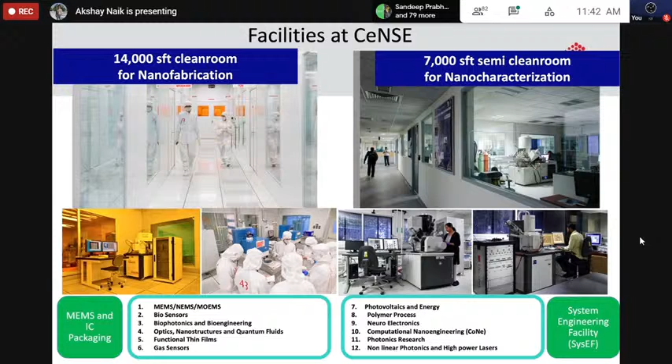Even if you do not have money to pay for characterization or fabrication, we run a program called the Indian Nanoelectronics Users Program. We've been running this program for about 10 years now. What it is, we give them three-tier training.

The first is basic training, where we have 2 to 3 days of intense lectures, where we get about 60 to 100 scientists. Then we have advanced training, where scientists come here in a batch of 20 to 25, and they undergo training for 2 weeks on the tools, fabrication tools, characterization tools, and so on.

And the third part is projects. For example, if you're doing a PhD, or if you want to do some research project, you can come here and do this research project for a month, 2 months, or however long it takes, and we will facilitate that.

And the entire thing is free of charge, and it is being supported by MHRD, which is now Ministry of Education, and Ministry of Electronics and Information Technology. We've supported about 1,000 projects in the last 10 years. This is a joint program that we run along with IIT Bombay. So if you're interested, you can certainly take a look at this.

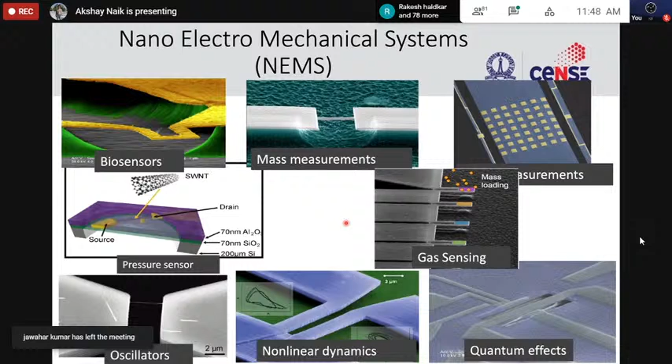I'll give you a brief introduction to how we fabricate these devices, and we can teach you this if you decide to come here. You take a silicon wafer, and deposit silicon oxide on both sides, top and bottom. Then you can strip off the top - this is optional, but let's say you strip off the top silicon oxide. Then on top of this you deposit silicon carbide - you can deposit any material, for example silicon nitride also, but in this case silicon carbide is deposited here.

On top of the silicon carbide, we deposit something called photoresist, PR. Then we use UV light to expose this photoresist at specific places. You dip the entire chip in a liquid that removes the photoresist from the area exposed to UV light. After that, you dip it in another liquid which removes the other exposed part. Then you can remove the silicon underneath, and you're left with a suspended cantilever that's free to move. That's how you make the simplest of these devices.

The great thing about these fabrication processes is we can really make extremely small, intricate devices, like what Professor Mohite showed previously. Here are some of the devices that we make.

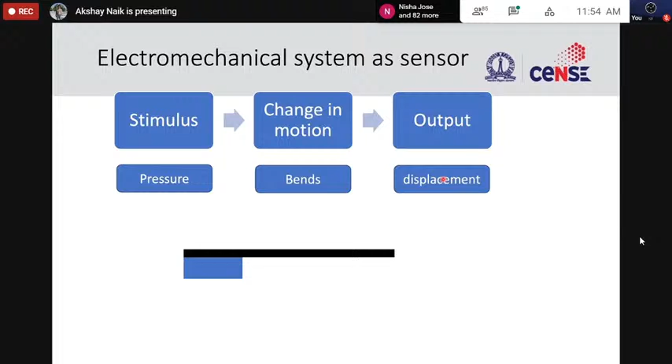It's free to move here. So can we use this, for example, as a pressure sensor? If you provide a stimulus of pressure, what's going to happen is it's going to bend - this mechanical element will bend. And in terms of output, you could say the displacement, how much it bends, is our output. Depending on how much it bends, you should be able to extract what the applied pressure is. That's the whole system.

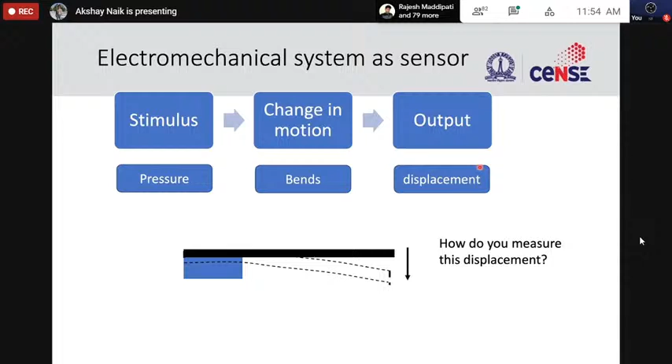There are lots of questions in a very simple system like this you could ask to improve the sensor you have. For example, you could ask, how do you measure the displacement? Since many of you have mechanical engineering backgrounds, you've studied these beam structures. If it's a really large beam, it's very easy to look at the displacement or bending just by eye if the structure is big.

But as you saw, the kind of systems we make are really small - hundreds of microns, even 1 micron in size. So as you make devices smaller, the displacement or bending that happens becomes even smaller, and you won't be able to use your eye. So you could say I'll use an optical microscope. What about if the displacement is smaller than a few tenths of a micron? Then you could use an electron microscope. What if the displacement or bending is less than 10 nanometers? Then people started using some electrical schemes.

For example, the interdigitated capacitor that the previous speaker talked about, for gyros. People also started using optical schemes. So all of these are continuously improving how you do better displacement measurement. If you have better displacement measurement, you can then measure smaller and smaller pressures.

I have better and better sensors. So you could ask a similar question: other than improving displacement, how can I make it more sensitive? The simplest answer would be, if you make your cantilever more compliant for the same pressure, the displacement would be larger. All right, so that's how you make it more sensitive. These are some of the questions you ask to improve the sensor that you have.

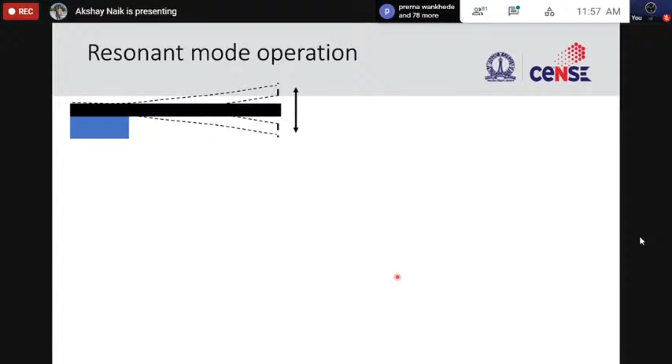So what happens at resonance is, for the same force or pressure that you apply, the displacement is enhanced by the quality factor. Because the damping is low, for the same force you have a much larger displacement. That's an advantage, right? If your quality factor is 1000, you have already improved your displacement measurement by a factor of 1000.

That's why we use these devices in resonant mode, and these are especially useful if the devices are very small, where doing the measurements using the eye or conventional methods becomes very difficult.

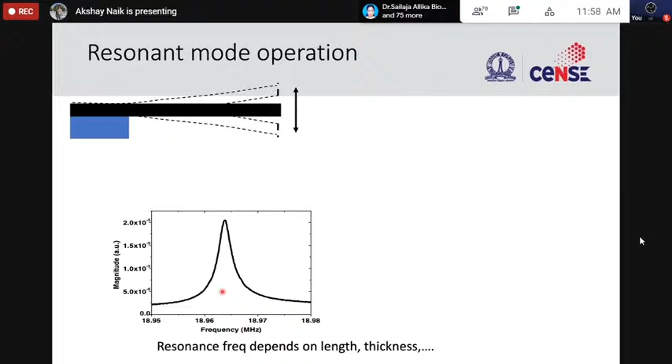Now, beyond that, the resonant frequency, the frequency at which this vibrates, depends on various properties of the cantilever or beam that you have. For example, if you change the length, the thickness, or if the Young's modulus changes, all of these are going to change the resonant frequency. That's the part we will use in our sensor - that's how we will do the sensing.

For example, what we'll do is drive this mechanical element, this cantilever, and see how the resonant response changes. How does this change in response to, say, a temperature change? For example, if I heat up this cantilever, how does the resonant frequency change? How does the resonant response change?

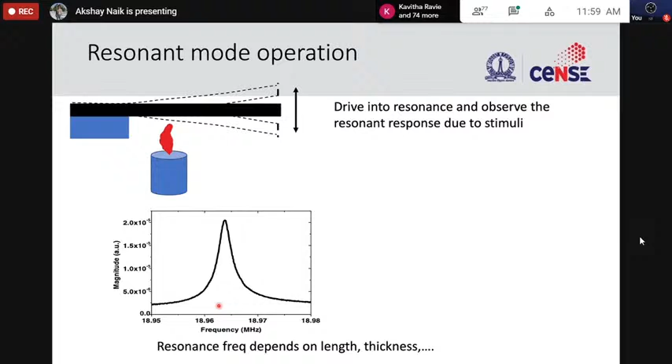Maybe it moves to a lower frequency. Initially, the resonant frequency was here, at this frequency. Now, because of the heating, it has changed here. Now, if you know all the relevant properties - for example, how the temperature changes the modulus or the length and so on - you should be able to figure out, just based on this change in frequency, how much the temperature of this cantilever has changed.

Even in this mode of operation, there are two ways of doing the measurement. One is to look at how much the resonant frequency has changed, or the other is to look at how much the amplitude has changed. I will go through these in the next couple of slides - these are the major ways of doing this. But there are lots of different reasons why you would choose one over the other, or over the amplitude change, and it depends on what you want to do, what your goals are, and so on.

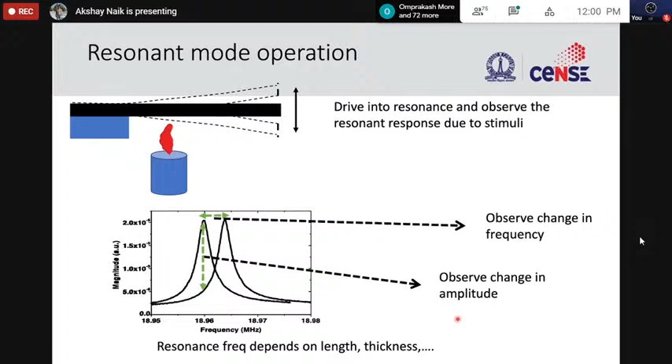So let's look at these modes of operation - how do we do the actual measurements in these devices? Let's say we want to always look at change in amplitude - how does the displacement change in response to the stimulus that we provide? So this is our resonant frequency, right here, where the amplitude is maximum.

In this case, I will always do the measurement at a specific frequency - my measurement will always be to look at amplitude at that specific frequency. I will pick this particular frequency and measure the amplitude at this frequency, which at this point is A0. Now let's say I change the pressure or temperature - because of that, the response has changed and the resonant frequency has moved to a different frequency.

Now the resonant frequency is here, but I'm still doing the measurement at this particular frequency which I have picked. The amplitude at that particular frequency is A1, and that's the change in amplitude that has happened because you've changed the temperature, pressure, or whatever sensor you have. In general, we do not do the measurement like this.

What we do is we continuously monitor amplitude as a function of time. So we have amplitude here and time on this axis. Initially the amplitude was A0, but because we changed the temperature, now the amplitude is A1. Obviously there will be some slow response, some time taken to respond from A0 to A1, and this will depend on your measurement system and how the device is, and so on.

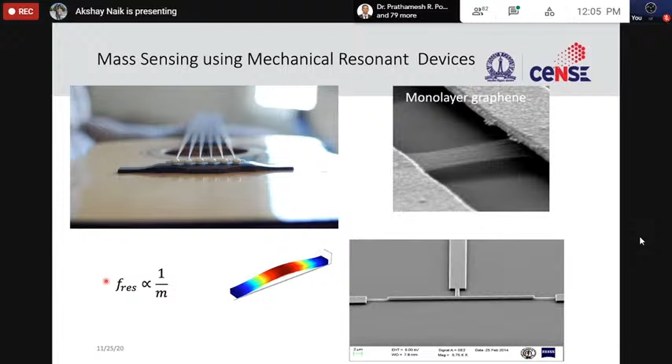And we will use this to do our detection. So the principle of mass sensing remains the same. Let's say you have a guitar string, you tuned it to a certain frequency, and you know the mass of this guitar string.

And let's say your son or daughter comes home and puts chewing gum on top of the string. The resonant frequency has changed because there is added mass. Now, if you want to find out the mass of your chewing gum, all you need to know is this change in frequency, and you should be able to figure out what the new mass is. From the new mass, you should be able to figure out what is the change in mass that has happened because of your chewing gum. It's as simple as that.

And we do this again in real time. You look at the frequency shift, and based on this frequency shift, you should be able to figure out what is the mass of the chewing gum in this case. In our case, we look at gas molecules, protein molecules, and so on.

Again to emphasize, if you know the frequency shift that has occurred, you already know the mass of your device, you already know the resonant frequency of your device, and you should be able to calculate the added mass. It's as simple as that. The only condition in this case to get this equation is that this added mass must be much smaller than the mass of your cantilever or your guitar string or whatever. That's the only condition to make this approximation.

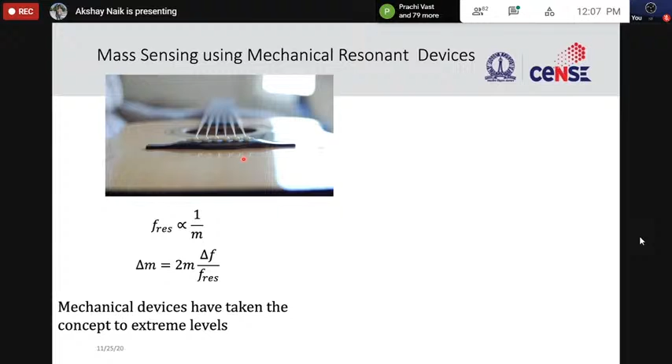As you make devices smaller and smaller, the minimum mass that you can measure improves dramatically.

For example, if some of you have used evaporators, they have something called quartz crystal monitors. Those work on exactly the same principles. They have a vibrating element. As you evaporate material, it deposits on that element, and because of that, the resonant frequency changes, and that's how you detect how much material has been deposited. In these cases, the resolution of these crystal monitors is about nanograms, 10 to minus 9 grams.

As you make devices smaller and smaller, the minimum mass that you can measure improves dramatically. Even when you go from a MEMS device, which is hundreds of microns, to a NEMS device, hundreds of nanometers, the resolution improves dramatically. For every one-tenth reduction in dimension of these devices, the resolution improves by about 1,000 to 10,000 times. So there is a really dramatic improvement.

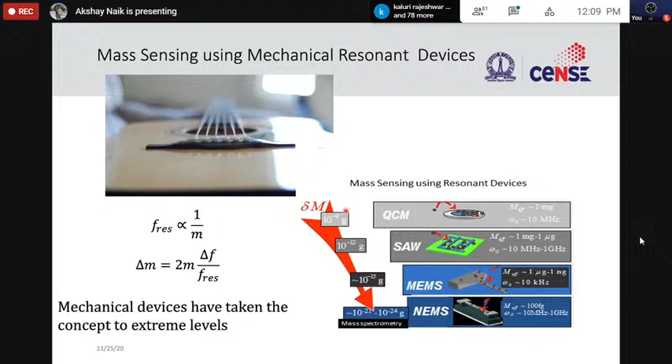To give you a sense of what this 10 to minus 24 means, that's individual hydrogen atoms. In idealized experiments, people have shown that they can actually measure, in principle, hydrogen atoms. In other measurements, people have shown that you can detect individual biomolecules, proteins. That's a great achievement made possible because of the reduction in size of these devices.

Let's make a gas sensor. We'll make a gas sensor, we'll make a biosensor, we'll see how to improve them, and then we'll also try to see if we can make a detection scheme to detect individual biomolecules. Let's look at gas sensors.

So here is our cantilever. Again, the resonant frequency depends on the mass. To detect the gas, I'll spray in the gas, and this gas will deposit on our cantilever. Obviously, the mass has changed because the total mass is now a combination of this yellow part and the black part, so the new frequency is different from the old frequency. You again measure this change in frequency.

So the question you ask is, is this a good sensor? The answer is not entirely clear. At first instance, I would say yes, it's a good sensor because now I can detect this yellow gas that I sent in. But if I ask, sure, you detected that yellow gas, but how do you know it's actually this yellow gas and not this red gas? Would you be able to tell me which gas landed on your cantilever? Based on this experiment, it's not possible. It's almost impossible to tell.

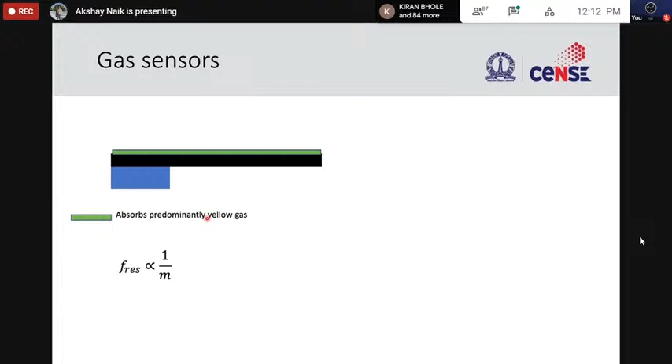So what we'll do is take the cantilever and functionalize it. By functionalize, all you have to do is coat it with some chemical which will predominantly capture the yellow gas, and maybe a little bit of red gas, but predominantly yellow gas. Now you do the measurement again: you spray it, it sticks, the resonant frequency changes, and again you see a frequency shift. Now this is a slightly better gas sensor. You ask again, is this a good sensor? It's better than the previous one, but there are two things you have done. One, you added this green part to your cantilever, which means the size or dimension of your cantilever or sensor is now bigger.

As I said earlier, if you make devices smaller, they are more sensitive in general. If you make them bigger, they are not as sensitive. Just by adding this, you've compromised on the sensitivity of your sensor.

That's one part. The other part is, sure, the cantilever absorbs this yellow part predominantly. But what if, even if it absorbs a very small quantity of red gas, it might absorb this much portion of the entire red gas and still produce the same frequency change. You still do not have a way of identifying whether you absorbed this much gas of yellow or a very big portion of red. You have no way of knowing.

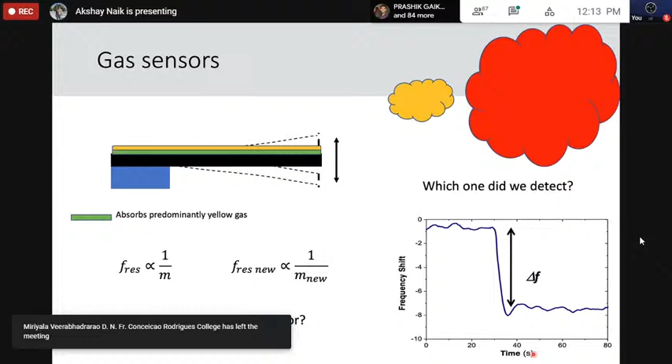Okay, so can we improve on this a little bit more? Can we do better? So what we'll do is, one way is to say, I will try to collect a fingerprint of these gases. What we'll do is we'll have an array of cantilevers, and we will functionalize each cantilever with a different chemical.

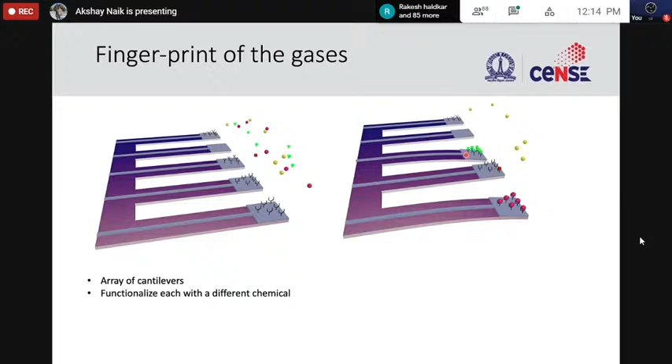When the gas comes, for the same gas, each cantilever responds differently. For example, this cantilever bends or changes resonant frequency by a large amount. This one doesn't change much. Let's try to do this.

So what we'll do is, as I said, each cantilever will have a different response, and this combined response of all these cantilevers with different functionalizations will be considered a fingerprint, and I'll show you how.

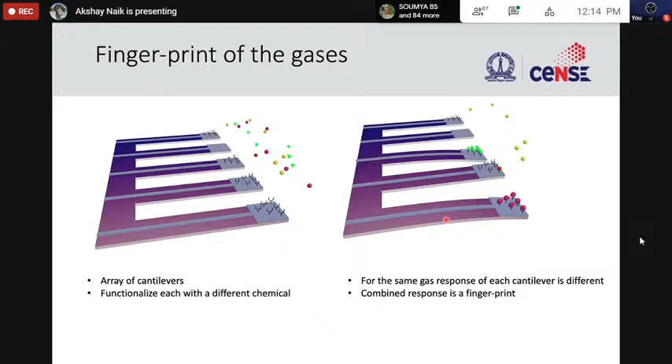Here is the array of cantilevers. We have functionalized each cantilever with a different chemical, and we will monitor the resonant frequency of all the devices, all the cantilevers. Here is the resonant frequency as a function of time.

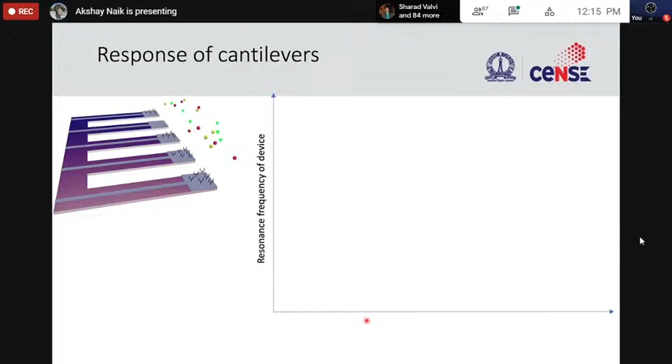Let's send in gas 1, which could be yellow gas, for example. The first cantilever doesn't change much—maybe as the gas comes in, the resonant frequency changes a little bit and goes back up. The second cantilever, and all the cantilevers are shown here, might change by a significant amount. The third not so much, the fourth a lot, the fifth a little bit. Now let's do the same thing for gas 2.

In this case, the fingerprint will be entirely different. For example, cantilever 3 might not respond as much to gas 1, but might respond by a large amount to gas 2. Similarly, cantilever 4: in response to gas 1, the frequency changed a lot, but in response to gas 2, it did not change much.

So what we'll do is we will use the ratio of all these different cantilevers as a fingerprint. For example, if the frequency shift of the first cantilever was just 1 hertz, the second 7 hertz, the third 2 hertz, the fourth 9 hertz, and the fifth 4 hertz, the fingerprint is the ratio of these: 1, 7, 2, 9, and 4.

If you increase the amount—say you double the amount of gas 1 that you send—the only thing that will happen is the fingerprint will now show 2, 14, 4, 18, 8. But the ratio remains the same.

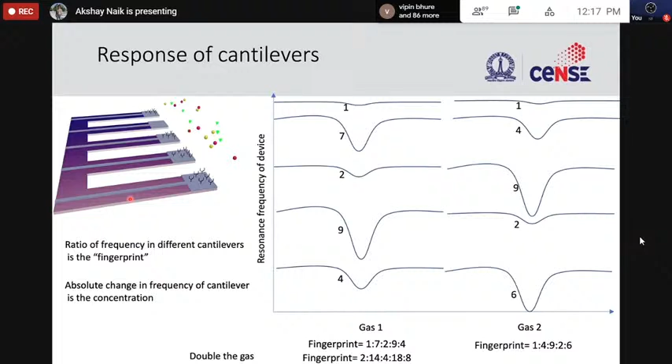Okay, so we talked about gas sensors. Let's next talk about biosensors.

By biosensor, what I mean is typically we are interested in what is happening in our body, for all kinds of reasons, to detect diseases and so on. So let's say we have a cell, and we are interested in the biomolecules present in the cell. Let's just assume these are the biomolecules present, and we want to detect one of them—let's pick this one, the heart one. So how do you do the detection?

What you can do is take the contents of the cell, break the cell open, take those contents, and put all of them onto your cantilever or your sensor. They all deposit there, and obviously it bends down. Is this a good sensor? The answer is no. The only thing you have shown is that it can detect something, but what you are detecting—that information is absolutely not available.

You don't know whether you've detected the heart ones or the sun kind of things. So what you can do is something similar to what you did previously for functionalization. You can come up with molecules which will capture only specific types of molecules, like antibodies, that you put on top of your cantilever, and they will capture only or predominantly these heart cells.

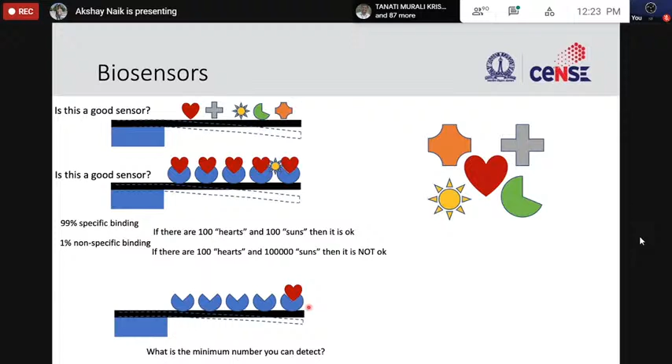What is the minimum number of biomolecules you can detect? Because if you detect a smaller number, you will be able to do disease identification at an earlier stage. For example, in cancer, the earlier you detect it, the greater the chances of recovery.

The other question you could ask is, I've built this biosensor, how do I use it? It's a very simple question but extremely important. For example, I could say I have made a chip with these cantilevers, and I can pick it up by hand and dip it in the bio solution. Is this a good enough method? The answer is no, because humans are prone to errors.

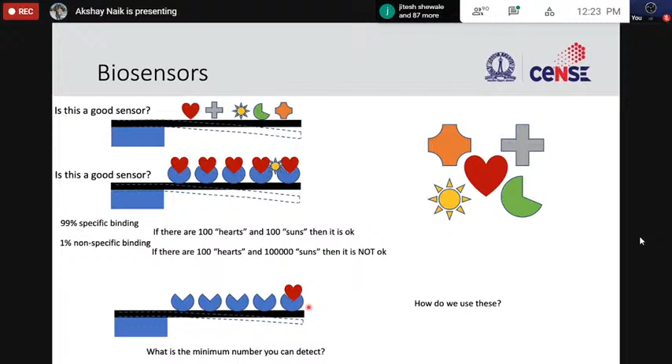On top of these cantilevers, you will have probe molecules which capture the target molecules, and you will see some bending, which helps you identify how many target molecules were present in your cell or in your body, or whatever sample you're testing.

Okay, now will this make a good sensor? Again, the answer is not clear, and again it depends on what you're trying to do.

One of the first things you will realize is, because you're going to do these measurements in liquid, in a flowing liquid, the damping will be large, which means the quality factor will be very small. And we talked about the advantage of having a large Q, and that advantage is almost lost here. That is one problem.

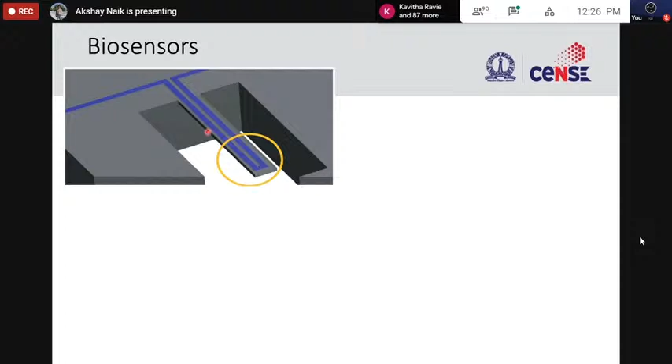We said, look, if you put the cantilever in the liquid, the damping increases, the quality factor decreases. What if you made a channel inside a cantilever? So what if the liquid is inside the cantilever, as opposed to the cantilever being in liquid?

In this case, what they have done is they have made channels inside this cantilever. The blue line is a channel. Here are the zoomed-in cartoon images. So you have the liquid flowing in this region, coming in and flowing out.

If the number of biomolecules of interest is very small, you have a certain frequency. As the number of biomolecules of interest increases, the frequency decreases. So in this case, you have solved, at least to a large extent, the problem of having large damping. You can manipulate these structures, as well as how the liquid flows and what kind of liquid flows, to improve the quality factor.

I think, if I remember right, the quality factor these people achieve is close to 1000, which is very good, and the liquid is still flowing through the cantilever.

But there is a problem. While you are increasing the quality factor of your cantilever, while allowing liquid to flow through, what you have to compromise on is the size.

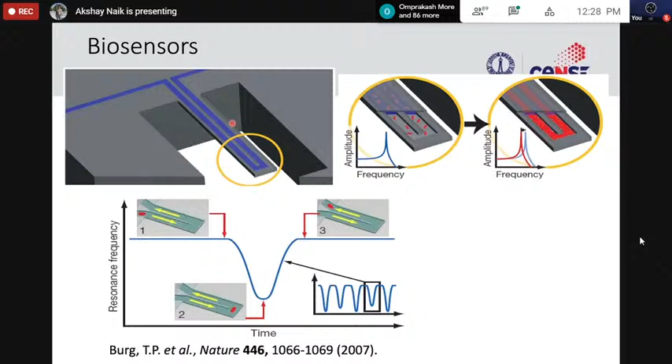For example, if you want the liquid to reliably flow through these channels, you would want the channels to be, say, about hundreds of microns. That means the width of these would be about 500 microns or a millimeter. In that case, the length of these would be about 10 millimeters. So you are really in the millimeter size range. You have lost out on the sensitivity you gain when you make devices smaller.

Okay, let's go a little bit further and see what else we can think about in terms of mass sensing. In all of the cases I talked about, both in gas sensing and biosensing, we assumed a uniform coverage on top of the cantilever.

The response, the frequency change, is dependent on the amount of mass that I have put on the cantilever. So the frequency change I get is dependent on this mass I have put on the cantilever. But what if the added mass was a point mass? I think a lot of you have studied this: uniform loading versus point loading. The response must be different. It's not possible that it gives the same answer.

For example, if I take a biomolecule or a particle, whatever, and add that point mass specifically at the free end, what is the frequency shift I get? Of course, I will get something. But will it be the same when I place it here in the middle of the cantilever? Will it be the same if I place it at the fixed end of the cantilever? And the answer, obviously, is no—it will change.

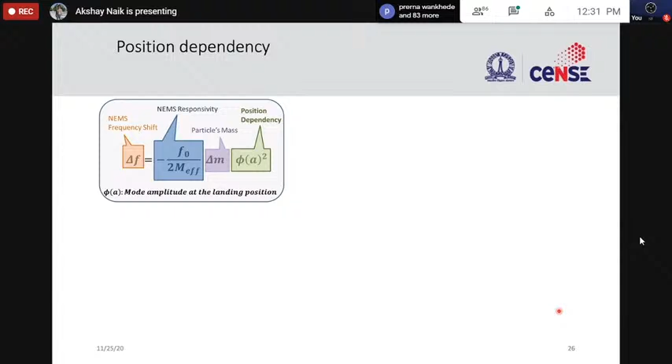But let's look at it a little bit more carefully. In gas sensing, again, you have uniform coverage, and what that means is this is constant, so this doesn't really matter. Whereas if you have point loading or point masses, you have to account for this part.

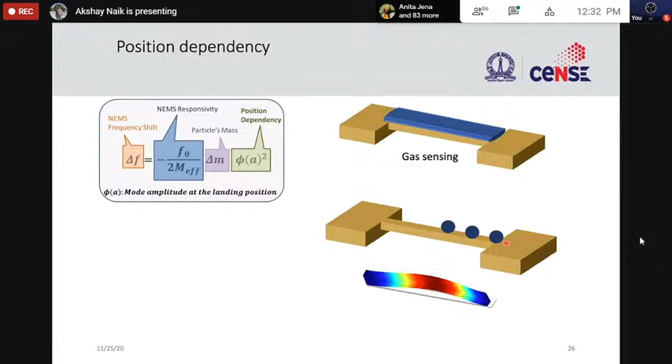So for example, let's consider the fundamental mode, the first mode of vibration. The displacement is largest at the center for this beam. So if the particle lands here, the frequency shift is maximum. If it lands here, the frequency shift is minimum. If it lands somewhere in between, obviously some intermediate value of frequency shift. So this frequency shift depends on the position along this beam or cantilever.

But the important thing to remember is even though we have lost this information, we can still detect individual biomolecules, and that's a huge advantage. We have capabilities now to detect individual molecules. The only thing you have to ensure is that you make devices sensitive enough, and the way you make devices sensitive is to reduce the size of the cantilevers or beams that you have. So let's see if we can do that detection.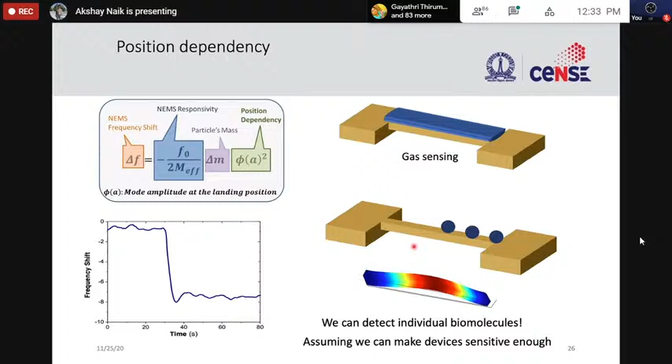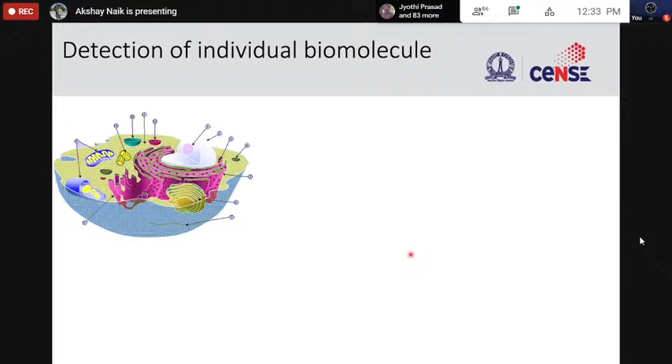Before we get there, let's try and see why we want to look at individual biomolecules. Your cell has all kinds of things and you are obviously interested in these things. One of the things people are interested in is what kind of proteins you have in your cell, in your body. Proteins do all kinds of functions. Here are some of them. Let's just say we are interested in defensive proteins. Why? Because it helps us protect against viruses and bacteria. Viruses are in vogue now, so we need to know whether we will be protected against certain viral infections.

A typical cell will also tell you whether you will get a certain disease or not. A typical cell, or I think this is for bacteria, will have all kinds of proteins with different masses, and the number of these proteins varies. For example, this 20 kilodalton protein, there could be a million. The 100 kilodalton protein could be a few hundred. If you don't know what a kilodalton is, it's about 1,000 hydrogen atoms, that's the mass. So let's say we do want to do detection of these proteins. How do we do this? How do you say I have this particular protein? In general, the way to identify proteins is by looking at their mass. If I can detect the mass of a protein, in general I am able to tell what that protein is.

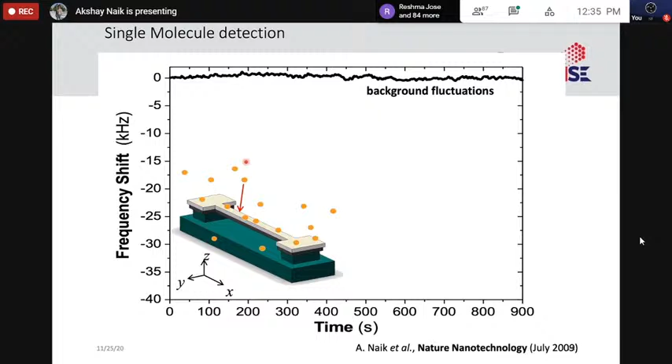As we've already done a few times, we will look at frequency shift as a function of time. We have a cantilever or a beam. If you do not send any protein or biomolecules, you will see that frequency doesn't shift with time, it stays the same. There are obviously some background fluctuations, but more or less it doesn't change. But now we send in some protein molecules onto this beam. They are landing on this beam. What you will see is that there are these jumps, frequency changes that are happening.

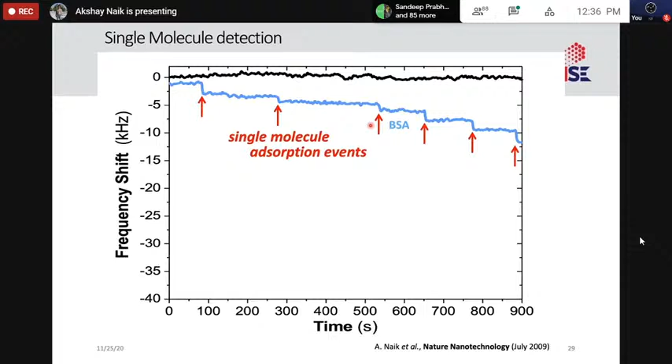Each of those frequency changes is because of one single molecule, one molecule coming and dropping on our device. And you can change the protein molecule, and we've done that, and you'll see these jumps again. This is one type of protein, this is another type of protein, and again each of these jumps is one single molecule, not thousands, just one.

But the question that immediately arises is, look, this is the same protein, but you can clearly see the frequency shift is completely different. For the same protein, it must have the same mass, right? So why are the frequency shifts different?

We already talked about it, and there are lots of other reasons why the frequency shifts are different. But from the mechanical system point of view, the reason is that it could be landing in the center of the device, center of the beam, or it could be landing at the clamped end of the beam. So depending on that, the frequency would shift.

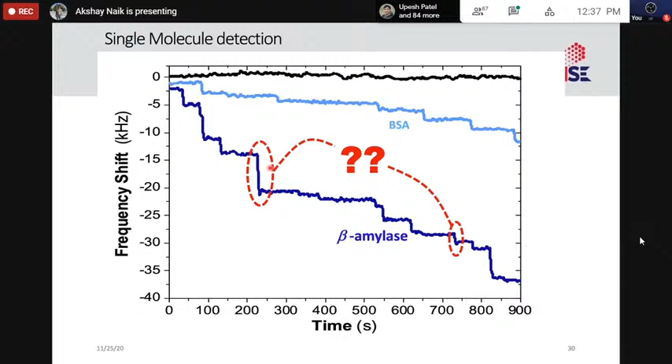So we have detected single molecules, and that is seen from the frequency shift, but we have not detected the mass — we cannot calculate the mass. The reason is this: we have a frequency shift that we are seeing, but we don't know two things. One is the mass of the biomolecule, the other is the position. So if you solve simultaneous equations, if you have one equation and two unknowns, that cannot be solved.

But on the other hand, if I have two equations and two unknowns, that equation can be solved. So the only two unknowns are the mass of the particle, the biomolecule, and the position of the particle along the length of the beam or cantilever.

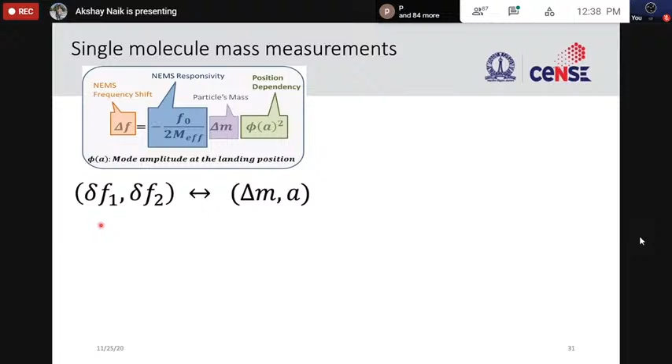But how do I get delta F1 and delta F2? How do I get two frequency shifts? Well, it's quite simple. Till now we've only been using the fundamental mode, the first mode, to do the detection. We can use the first and second mode.

So anyway, you have two frequency shifts: one for mode 1, one for mode 2, and using these two equations you should be able to calculate these two unknowns.

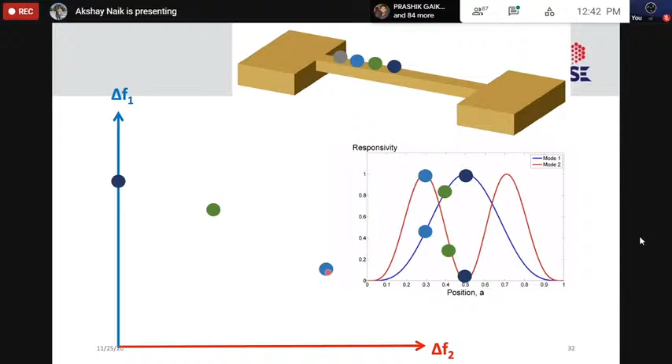You will see the frequency shift is reduced now, so F2 will be here. And then you keep going, and right at this point the frequency shift for both modes is minimal. So for the same mass, a particle of the same mass, you have different frequency shifts for the two modes. What it means is you have a curve of same mass. Depending on the position along the length of the beam, you will see this particular combination of delta F1 and delta F2.

Now, if I change the mass of the device, the mass of the particle - let's say this was 1 kilodalton, let's say I try the same kind of experiment with a 900 Dalton biomolecule - in that case, this is the curve. It's an equimass curve in some sense. If I increase the mass, all the points that lie on this curve will have the same mass. The only difference is the position.

Once I have this entire curve, and I can calculate this mathematically, what I can then do is go ahead and do the measurement. When I do the measurement, I will see two frequency shifts, delta F1 and delta F2. I place that delta F1 and delta F2 in this graph. Say, for example, if it lands here, I already know it's 900 Dalton - I know the mass. In fact, I can go ahead and back calculate the position, exactly where it landed.

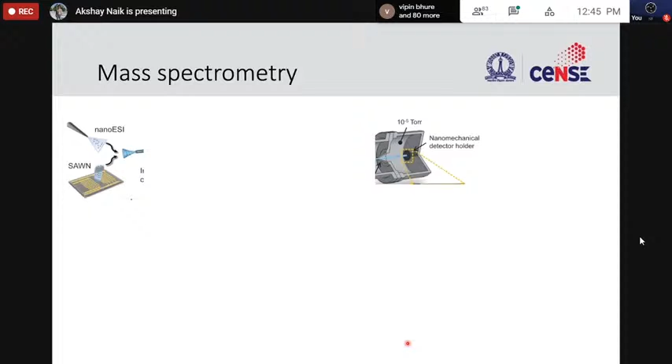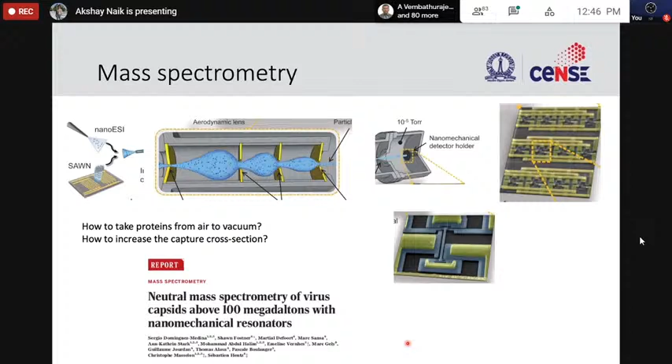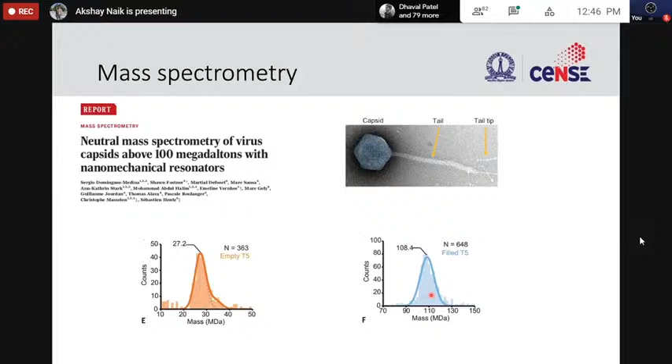People have taken this concept much further. For example, they have done detection on virus capsids, trying to figure out whether they can distinguish the virus with and without the DNA molecule inside it. If you know anything about viruses, a virus consists of two major parts: one is the capsid, the protective wall, and inside this capsid there is DNA or RNA. If the RNA is not there, it will not reproduce. So in their measurement, they are able to distinguish between virus capsids that have DNA or RNA inside and those that do not. That's the kind of sensitivity level people have been able to take these devices to.

In addition, there are lots of other applications, and I'll not go through these in much detail. For example, force sensing - what they do is make an array of these cantilevers. In this case, these are vertically standing cantilevers, sticking out from the chip. Then they take biomolecules and cells and put it on them. You can see that these cantilevers in this picture are very short, while in this picture they are very tall.

So the compliance of these is different from the compliance of this. They are trying to study how cells react to the stiffness of these cantilevers. And it gives you an idea of what is happening to the cell, right?

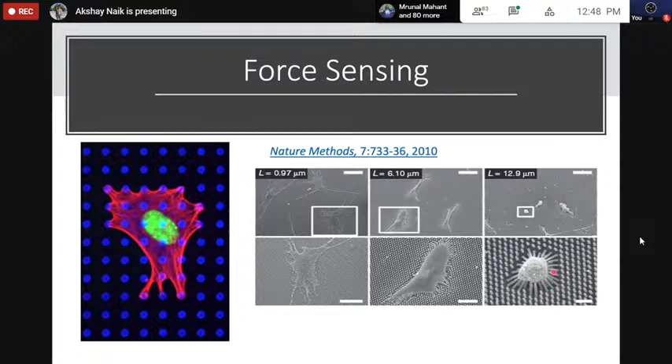For example, if you want to study how cells react to cantilevers with and without medicine. Let's say the cantilevers are holding on, the cell is holding on to these cantilevers very well. In this case, maybe this cell is healthy. Now let's say I send in some poison. What happens to the cell then? Is it still going to hold on to these cantilevers, or will it let go? And at what concentrations does it really lose its ability to hold on to these cantilevers?

Also, as I said previously, these devices have also been used in all kinds of fundamental studies. One is the question of, can I use this mechanical device as a quantum mechanical object? Just like people say this atom is a quantum mechanical object, can you say the same thing about our beam? There has been a lot of really interesting studies even in these cases. I'll again not go into details.

Okay, so that's all that I had.

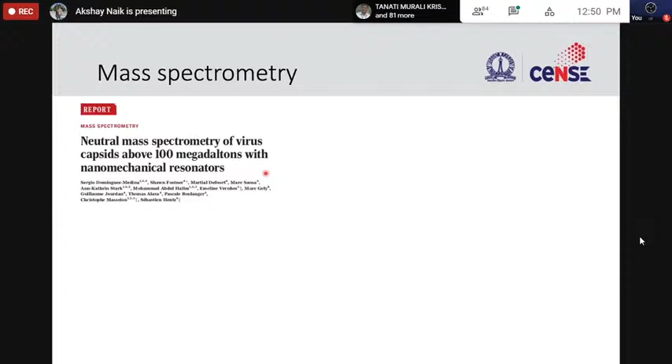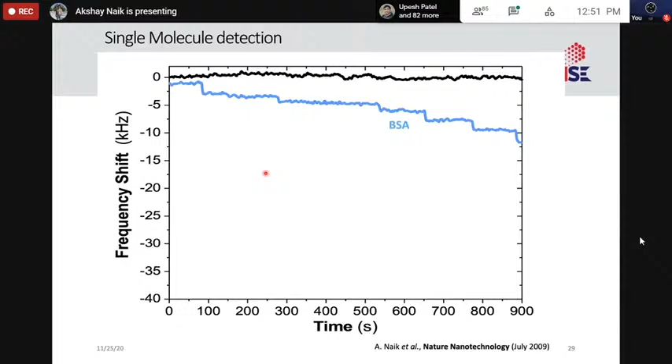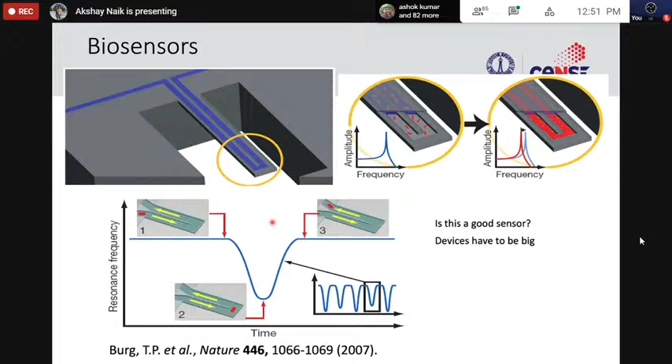Sir, you have shown the particular graphs of the things we measured with the biosensors and the liquid channels. So what I want to ask is, you have come across 3 to 4 configurations. In which configuration did we take this particular observation, and which two different equations did we form along the discussion? Are you talking about this particular slide? No, what I am asking is which method we followed for solving the particular two unknowns and two known equations.

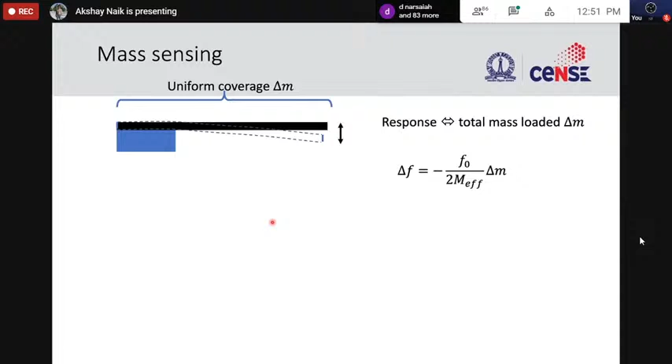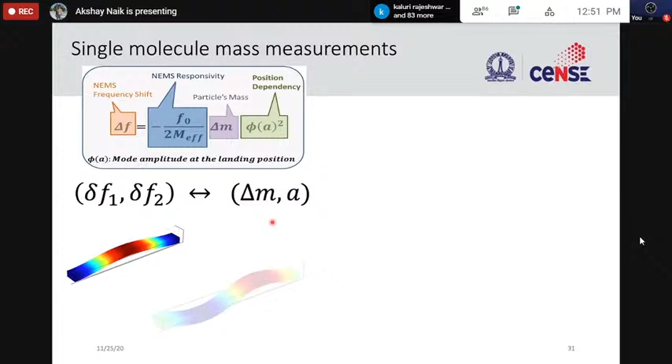Ah okay, I see. This equation, this one, sir. Yes, I understand. Right. So in this case, we do not...

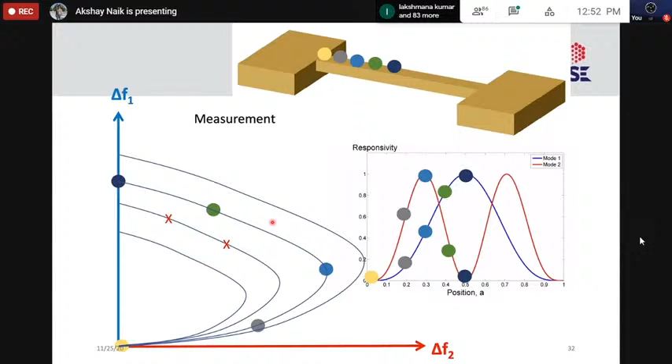You see, one of the things we have to do if you want to detect biomolecules, as I said, is make devices very small. What that means is if you do any functionalization, the mass of the device increases, and we cannot have that. So what we do is we do not put any functionalization on this device. There is no functionalization. So it is very small, I think the device length is maybe about 10 microns or maybe 15 microns.

This is done in ultra high vacuum. For example, I showed you gas sensing and biosensing. Biosensing is done in liquid, gas sensing is done in ambient air or whatever. We cannot do these kinds of sensitive measurements in air or liquid, again because of two reasons. One, the quality factor degrades very quickly for these small devices if you are in air or liquid, and we want very high quality factors, we don't want any damping. The other reason is if you are in air, there are gas molecules everywhere, and you will deposit those gas molecules on these devices.

And then you won't be able to see the effect of the biomolecules that we are interested in. So what we do is we make a specific measurement system which is ultra high vacuum and which only lets a few molecules at a time into the system, right?

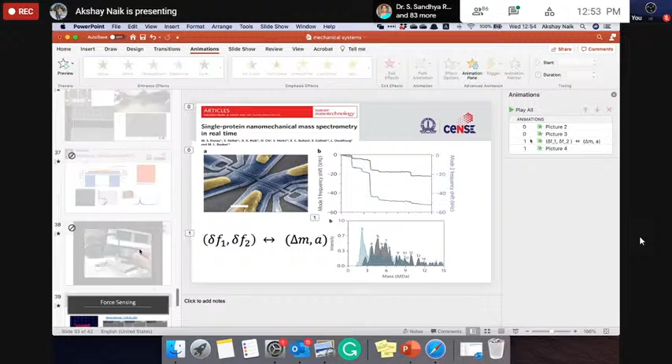I have one thinking also that if we have that particular spectrum of the molecules whichever we are using, so that we can detect the particular frequency changes whichever been recorded online, whether it is possible or not, sir. We might have some mass spectroscopy analysis of any biosystem or any gas system which we are tend to analyze, so that we can have that particular mass spectroscopy data, and whether we can match that particular data into our real time measurement or not, sir.

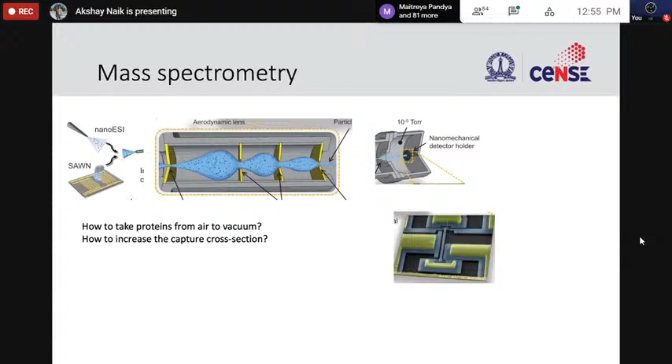Yes. So, for example, if you do the measurement, if you see that I have this frequency shift, based on this I can tell this is the mass. At this point, you could say these are the possible biomolecules that this corresponds to, because not every protein will have this mass. Now the question is, how confident are you that this is this particular protein? That's a very hard question to answer.

In general, what people do is, once they know the mass of the protein, they go ahead and do an additional step where they break this protein into peptides, smaller particles, and look at the mass of those peptides. Once you know the mass of those peptides, then you know what specific protein this is, because a protein will break into certain peptides. So once you know the mass of all the peptides as well as the mass of the protein, you should be able to tell what specific protein this is, and this can in general be done in real time.

Okay sir. Then after releasing of some energy, the peptides mass will be varying. So depending upon that, we will be finding out whatever the molecule has been seen. Right sir? Yes, yes. Thank you, sir.

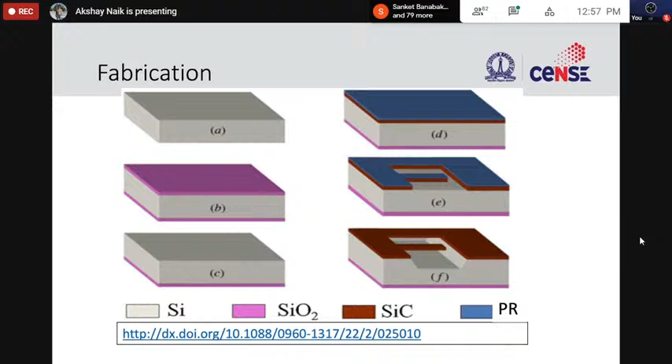Okay, I will try to answer the first question. When you say how do we measure the resonant frequency, there are many different ways. For example, let's look at this. What you see, and maybe it's not very clear, is a beam which is really long, and then you have a capacitor, a gate right next to that beam.

It's very hard to see, but there are two things. One is the beam which is clamped at this end and this end. The other is a gate which is connected to this. As the device vibrates, this is just one way of doing it, it gets closer to this gate and farther away. So it basically comes closer and moves away.

At resonant frequency, this motion is maximum. What that means is at resonant frequency, the capacitance change is maximum. So by monitoring the current flowing through the device, or by looking at the change in capacitance, you should be able to tell at what frequency you have the resonant frequency. For example, you sweep the frequency and drive this beam at different frequencies and see at what frequency the motion is maximum. Now that's one way of doing this.

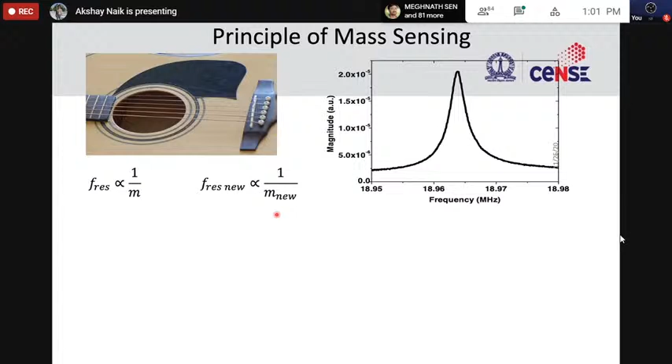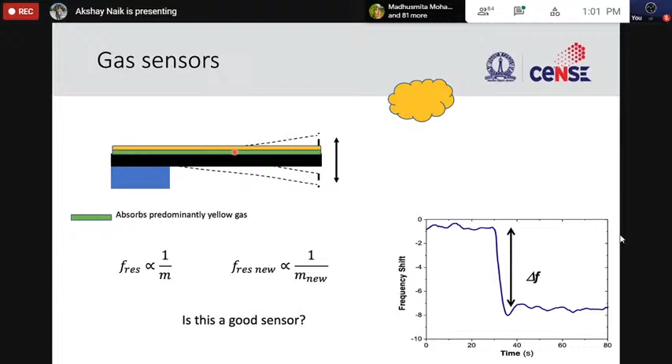That's a hard question, but the way to do it, I guess, is to have functionalization only at specific points. That is the simplest way. For example, if you functionalize the cantilever only, it will bind only at those places.

Let me go to this slide. So, for example, if you functionalize only the cantilever, only those areas will the biomolecule come and stick. Now, is it possible the biomolecules go and stick somewhere else? Absolutely. But you are not doing the measurements there anyway, so it doesn't really matter that much.

But you could say any molecule that sticks where you don't intend is a loss of material. That is absolutely right. You could probably coat the surrounding area with some other chemical so that things don't stick there. I'm sure there are many different ways of doing this, but for us, the easiest way is to put the functionalizing material only on the cantilever and hope that's exactly where the biomolecules of interest come and stick.

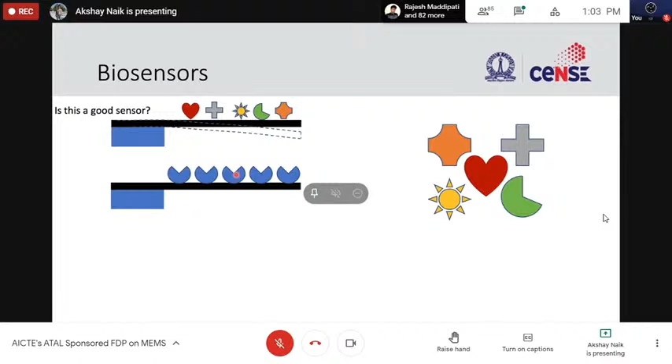Do you have any device or instrument that we can use to observe where it sticks? Because these devices are so small, right? And I usually don't work with biosensors - I usually work on sensing individual biomolecules. Figuring out optically where the molecule has landed is very difficult.

But as I said, if you do the measurement of two modes, I can tell where the biomolecule has landed along the length of the beam. If it lands away from the beam, I cannot tell. But on the beam, I can tell you the location - by doing the measurement, not by observing. You cannot see anything there.

Okay, sir. Thank you so much. Any other question? Any other questions from participants? That's all, I think, sir. One more question is there in the chat box, you can refer to it.

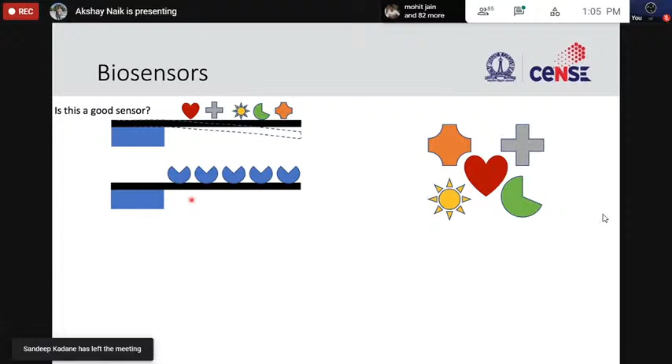Any other questions? I think that's it, sir. So thank you very much, Professor Akshay Naik, for giving your valuable time and explaining and simplifying the sensors. It was a wonderful session, wonderful to hear all these things from you.